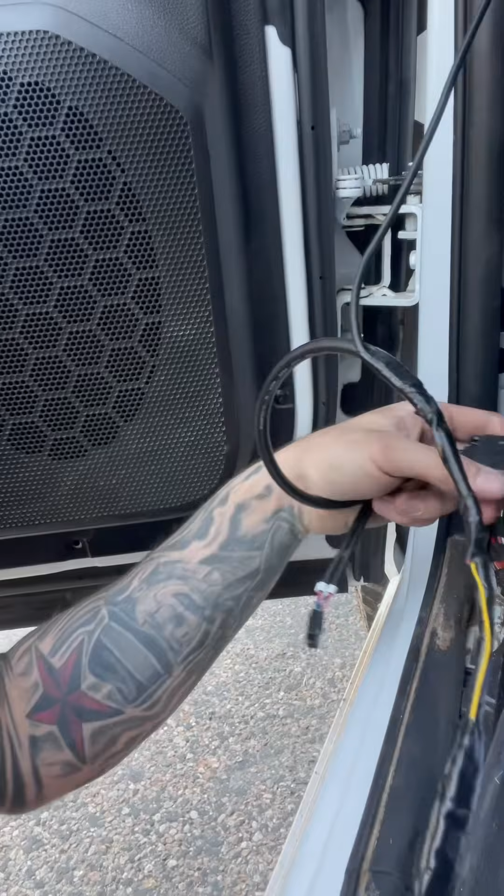This is the module here. So the module is right here. Okay, it gets connected to - sorry, I've got my phone freaking backwards - so it gets connected to the wideband.

So for those of you who can or can't see, you get in your truck and take a look up here, there is a rubber grommet by the steering wheel. I actually cut a hole in that rubber grommet and a hole in the other rubber grommet, and I ran the line through here.

The line goes down and goes over part of the transmission, under the transmission, and connects to where I have the wideband. I'll show that coming up in another part of the video, as we go step by step.

First, I'm going to get all the wiring where it needs to go, and then once the wiring is where it needs to go, I'm going to do the calibration, which I'll show in the video as well. Then once it's calibrated, I'll tighten everything down and cover everything up and basically hide it, so it has that clean factory look to it.

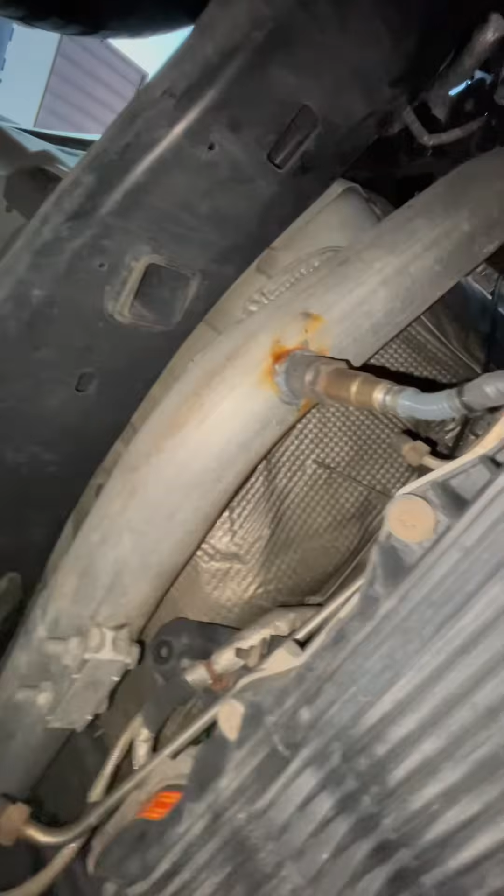So underneath the truck here, don't pay attention to the dirty ass TIG weld here. I went outside at work to weld it, and go figure, being in Texas, it got windy. So whatever, it is what it is. It's still a solid weld - there's no pinholes or nothing.

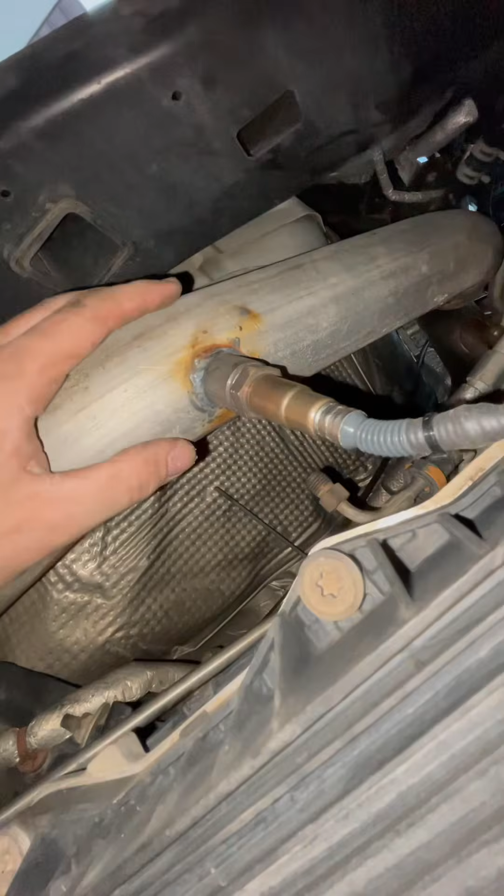So the wideband should be 24 inches from the turbo, which it is - 24 inches. And it cannot be dead set on the bottom. Now, I didn't want to take the pipe off the truck, because the proper way to do this would have been to take the pipe off the truck and put it up here somewhere.

But you can do it between, technically they say between 3 and 9, which is here and here. So this is real close to 3 and 9. It's just so when condensate runs down, it doesn't wreck the sensor. So it is recommended that you put it on the top.

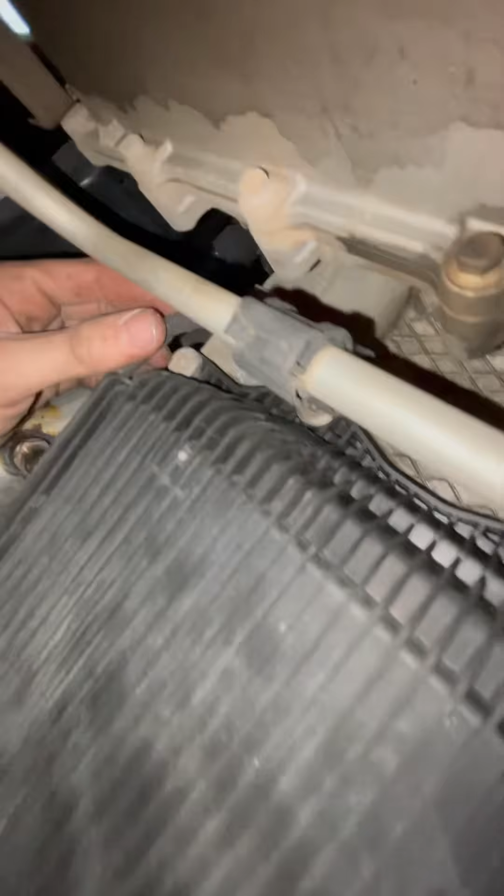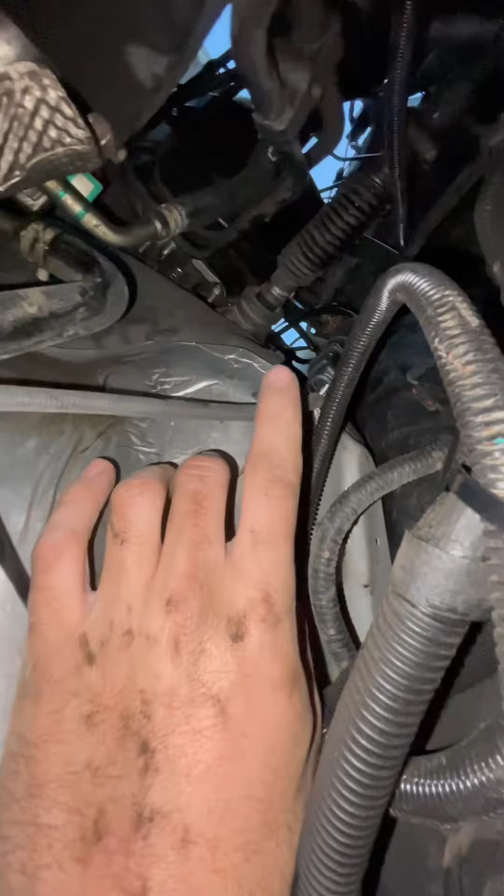So when we do the 4-inch down pipe, we'll put a bung on the top and put it up there. So it comes out, we go over this around the transmission, we go over here, we just put a zip tie up here, and then it runs up, connects, and then it goes through a connector on the firewall.

So from there, that'll be the rest of the video, showing kind of where the wiring goes and things like that. You need to leave this out to calibrate it.

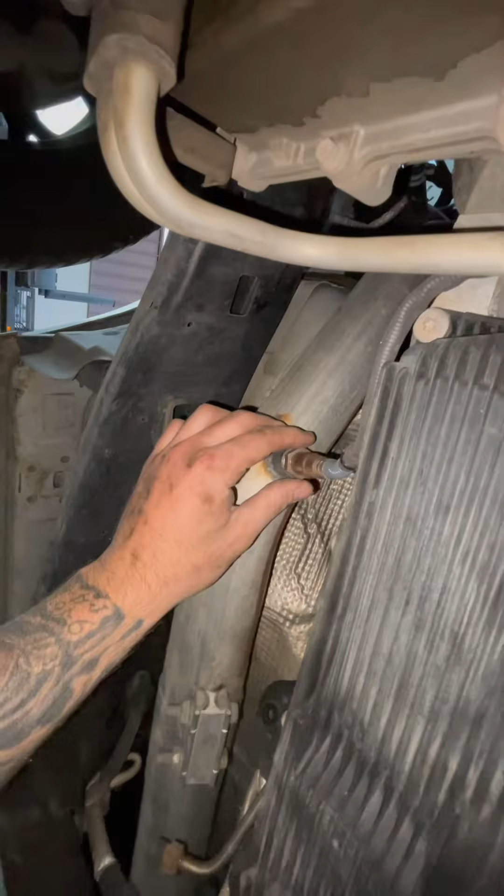So we have it - I shot the video backwards, so the sensor's already calibrated for me, but you have to leave this out in order to do the calibration. So just keep that in mind. Otherwise it's going to be a pain in the ass having to take it in and out.

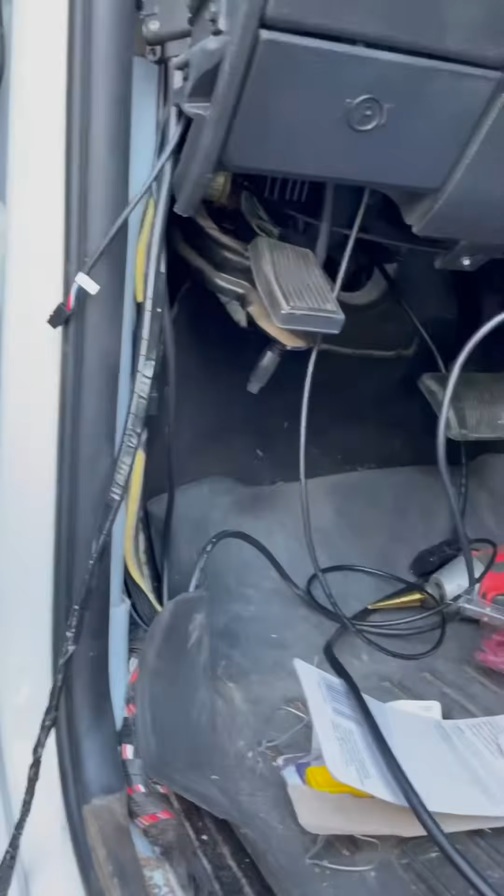All right, now that my Coke is watered down, let's take a look here.

So we have this panel off. Hold on, we have this panel off and this panel off. Now what we have here is the LC2 module, which is right here.

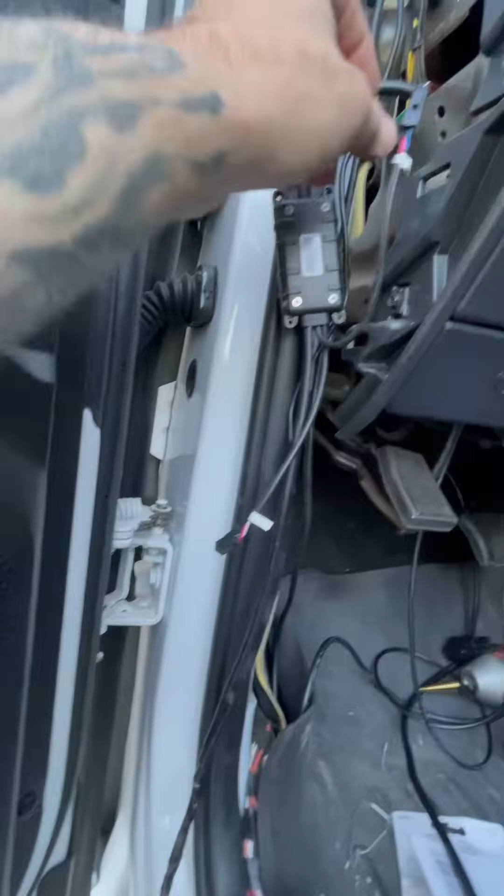We have an output. The output that comes with it is this serial, which goes to an old school computer. That's going to get hung up underneath the dash, and we'll buy the right connector for that, so we can plug in and actually log and make real histograms based on the engine, which makes editing and logging really easy for those of you who are familiar with HP Tuners and things like that. Now what we're doing is we're putting this right here, okay?

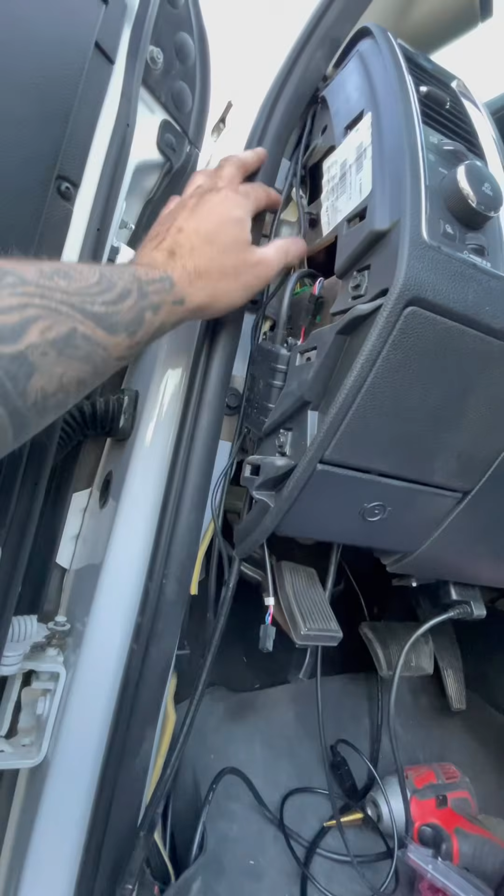Everything else is tucked up, all the wires are tucked up in here. The gauge is right there. So now we have this wire taped together. Everything's taped up. Here's the ground - we're going to choose to ground it right here to that ground.

Now the wire is super long, and it's probably honestly way too long, but the reason for that is, so I should start with this - we completely tape this because after it goes through the firewall and up the wall, we don't want to have to find the wire and protect it by any means. So we put tape on it so it'll go through.

It's made extra long. It's going to go up to the fuse box, so it's also going to go through that rubber grommet around the steering. It's going to go up over to the fuse box, and then we'll cut it to length and put the wires in their appropriate location.

For now, we're going to make changes later for a better power setup, better for the power.

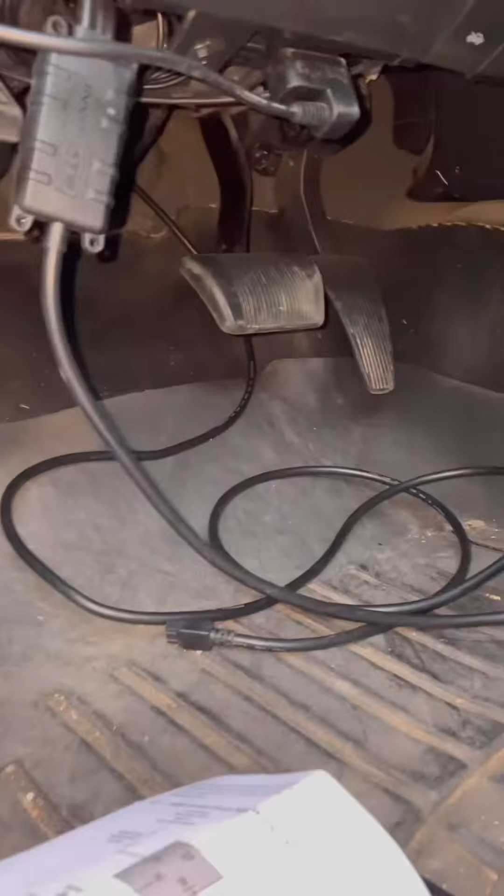Okay, so I moved stuff around a little bit. You can see there's just some wires here hanging out from underneath the dash. Ignore this, this is for my Banks, that'll have to get moved eventually.

And Banks, by the way, does make a 12-volt plug-in, so you can run it up to a fuse box instead of running an OBD2. So I'm going to have someone do that as well.

But so here's the module, whatever you want to call it. Here's the cord, it's plugged into the oxygen sensor. The oxygen sensor is not in the exhaust stream. And then this is right here. So what we're going to do is calibrate the sensor.

So this is our wiring, our thing right here. Sensor calibration, blah blah blah, have it in the right location. We went over that earlier in this.

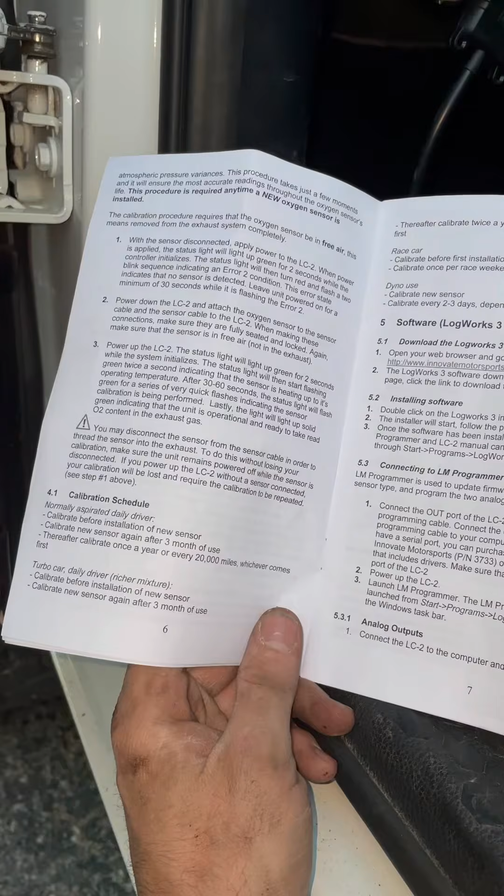With the sensor disconnected, apply power to LC2. When power is applied, the status light will light up green for 2 seconds while the controller initializes. The status light will then turn red and flash a 2-blink sequence indicating an Error 2 condition. The error state indicates that no sensor is detected - leave it powered on for a minimum of 30 seconds while it's flashing error 2.

It was an awful time to do this because I have to piss really bad. I'm not really seeing this flashing that it's talking about.

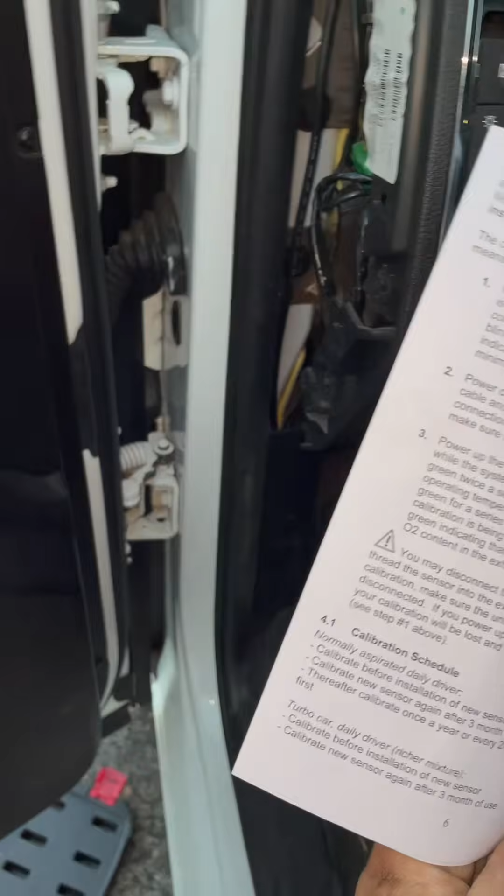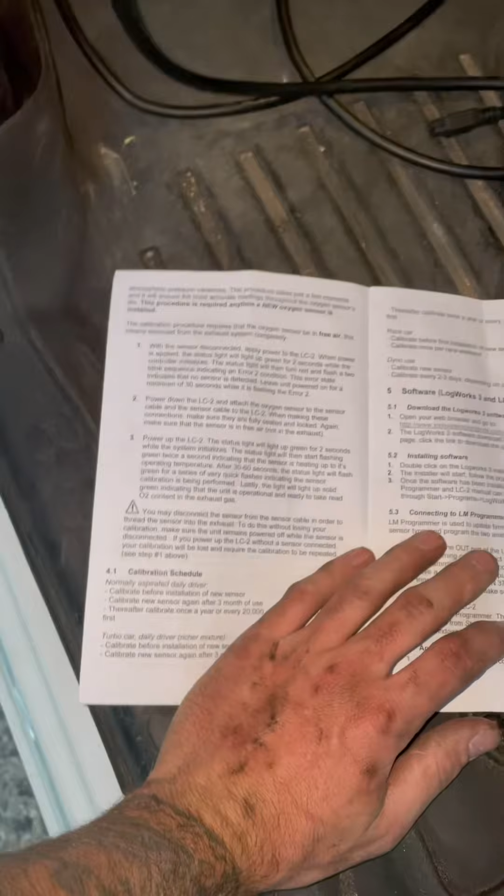Shut off, okay let's see what this is. So power down LC2, attach oxygen sensor. Attach oxygen sensor to LC2. When making these connections, make sure they're fully seated and locked.

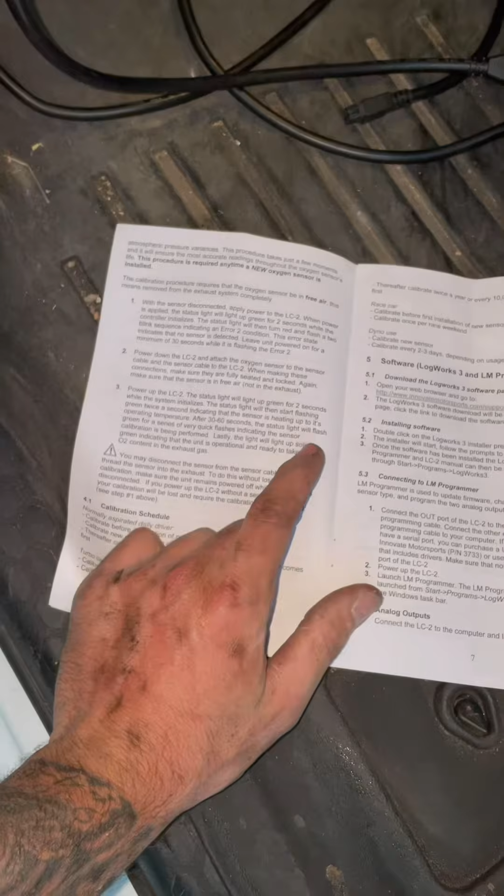Power up the LC2, so let's see what this does. There was definitely not a green status light like it said there was going to be. Doing this one-handed sucks, obviously. Unless there's a light on that box, but I don't think there's a light on that box either.

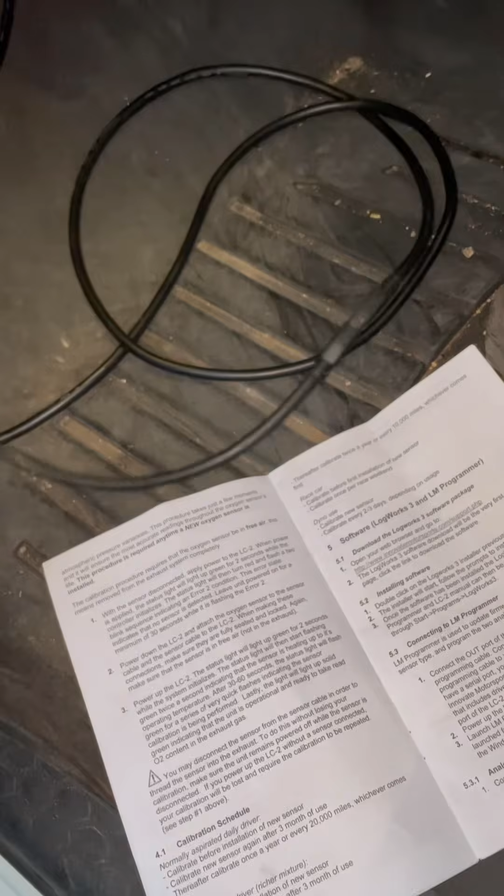Let's take a look here. Oh, all right, there's a light right there. I'm an idiot. Okay, let's go back to run. And it looks like it worked.

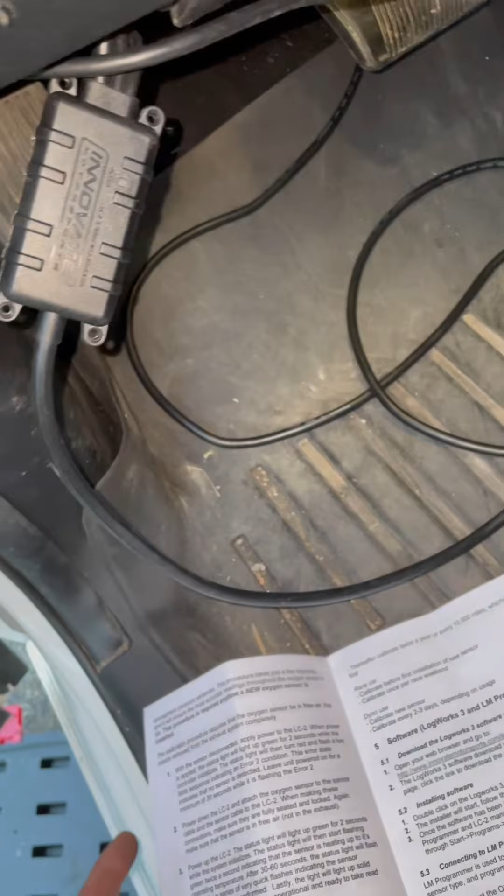So we're watching that green light. Let me turn my volume off here. We're going to watch this green light until it turns solid. Sorry it's getting blurry, that's from the flash.

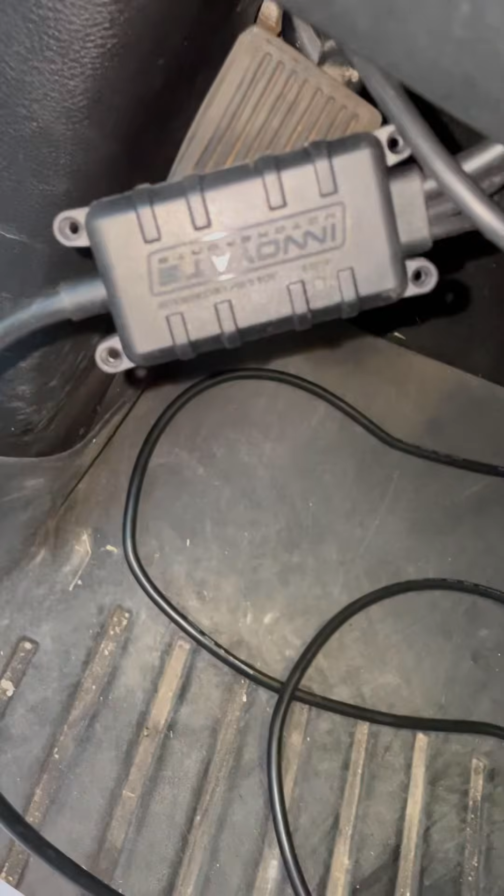Oh, I'm an idiot, so I'm using the fuel pump power. Oh, so it shows green, and now it's blinking. I don't think I'm going to get enough to do the calibration, so we'll see. Because I'm actually using the fuel pump for power, so obviously that's not going to work here if this is the case. So we'll see what this does.

Oh yeah, there it went. It's working, 22.1. It just shut off. Okay, so we'll turn it back off. Okay, we'll turn it back on. Well, it's showing 7.4, that's it warming up or whatever. Okay, so we'll just shut it back off.

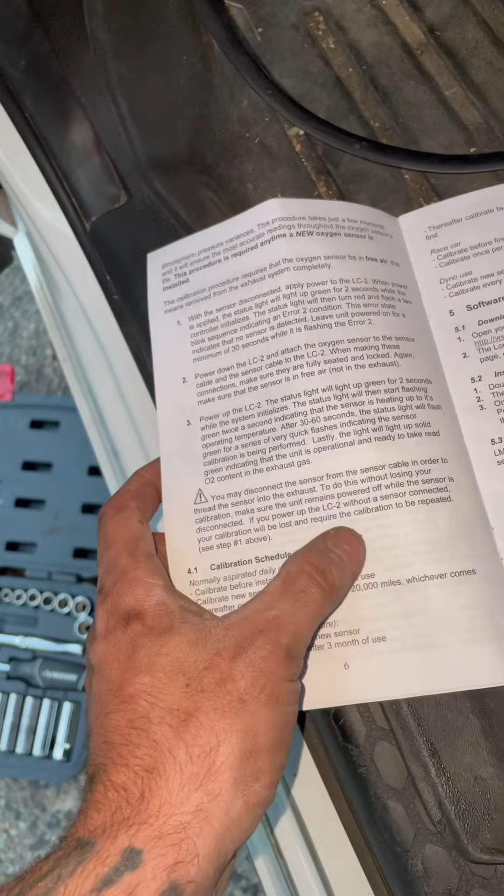Lastly, light will light up solid green, indicating unit is operational, ready to take read of oxygen sensor exhaust. You may disconnect sensor from sensor cable in order to thread the exhaust. Do this without losing calibration. Make sure the unit remains powered off while the sensor is disconnected. If you power up the LC2 without a sensor connected, the calibration will be lost.

Okay, so I'm going to get underneath the truck there and take care of putting the oxygen sensor in quick, and then we will start the truck up and see if it works.

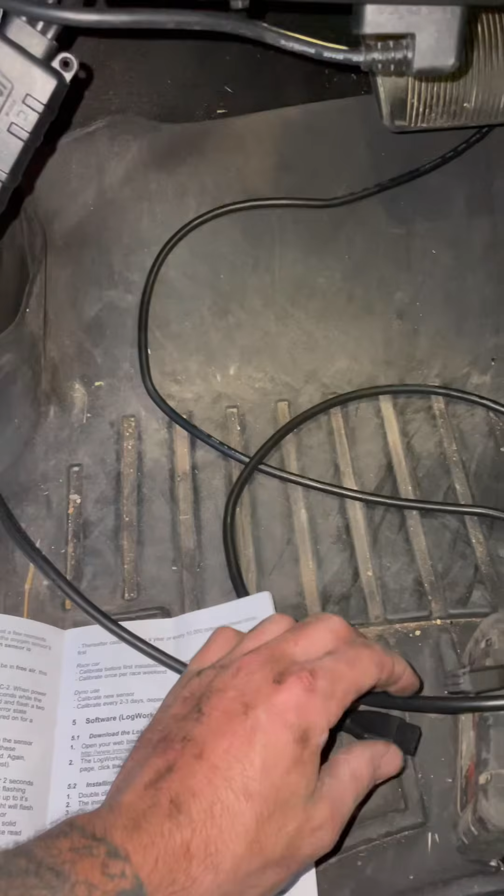All right, so sensor calibration, okay, oxygen sensor unplugged. You got to let this flash this red light for at least 30 seconds, okay? After 30 seconds, you pull power, plug this back in, and do it again. Okay, so give it a few seconds here.

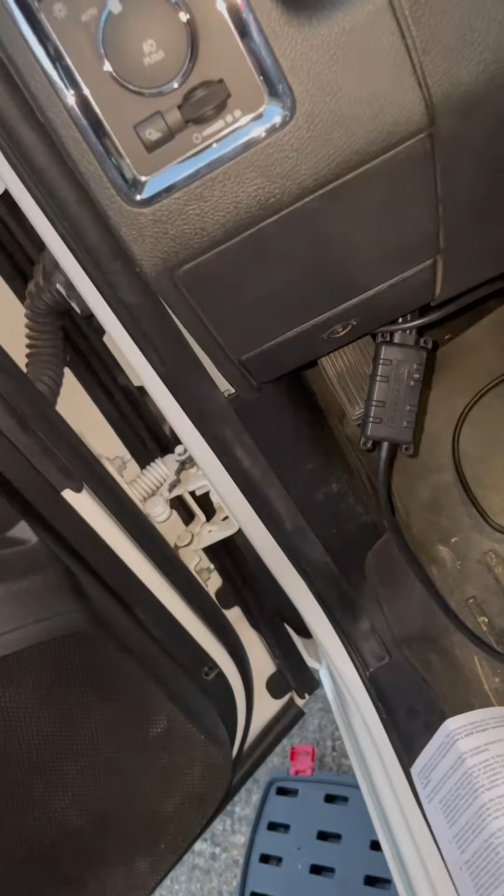We'll go 10, 9, 8, 7, 6, 5, 4, 3, 2, 1.

You know, I really hate having to calibrate this crap, but I guess it's a must. So pull power.

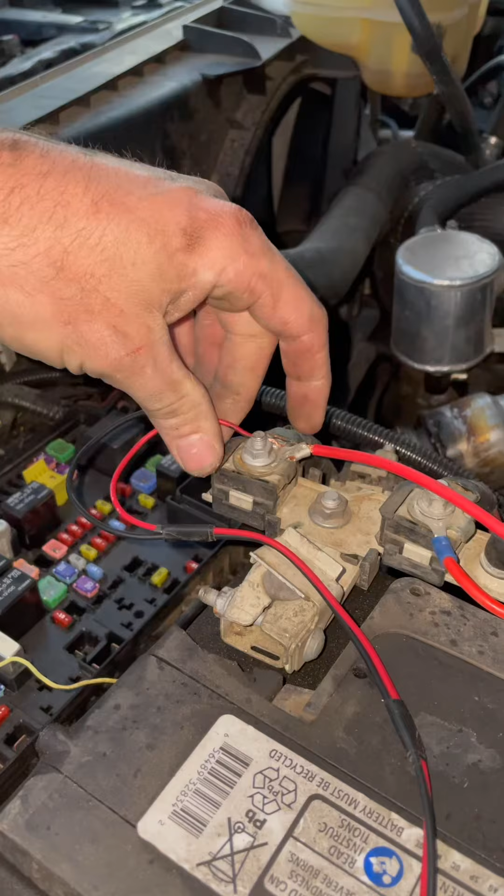Okay, come back, plug the oxygen sensor in. Now make sure the oxygen sensor is not in the exhaust stream, otherwise it's not going to calibrate very well. Okay, we'll come back and put the power on. By the way, this is hooked up like this right now because I have it hooked up to my fast fuel pump, and the fuel pump doesn't run long enough to do the calibration without running the truck.

Okay, see how it's flashing green? It's flashing green because the oxygen sensor is plugged in. The next step, when it's done, it'll go solid, and when it's solid, it means the oxygen sensor is calibrated, which means at that point you can plug in the exhaust, start the vehicle, and it'll run. Okay, so while that's flashing, we'll watch both of them at the same time and see what happens.

Okay. Okay, see it says 22.1. The green is solid. According to this...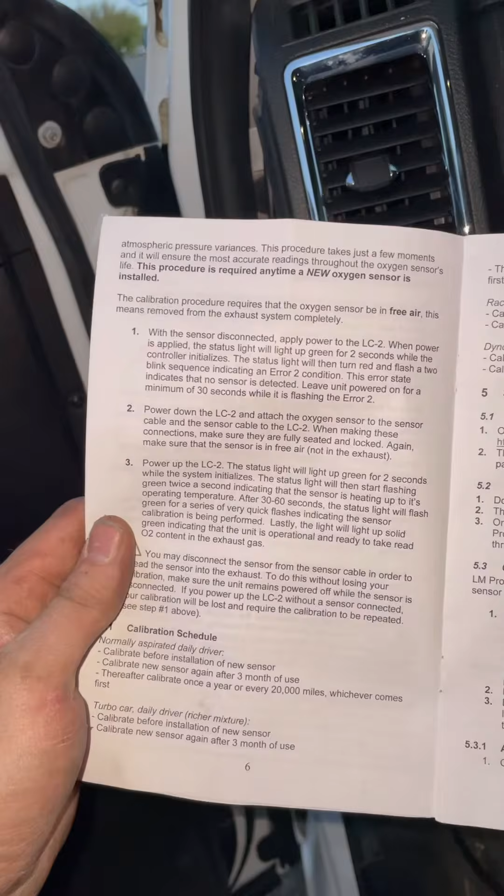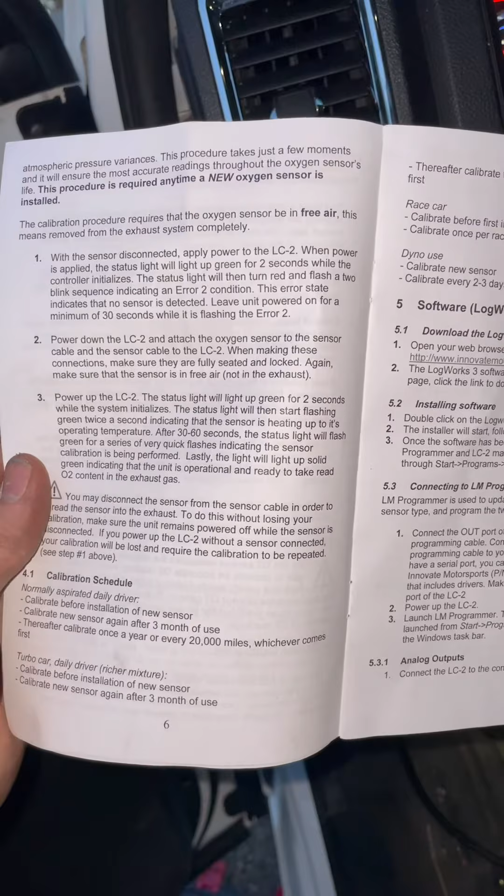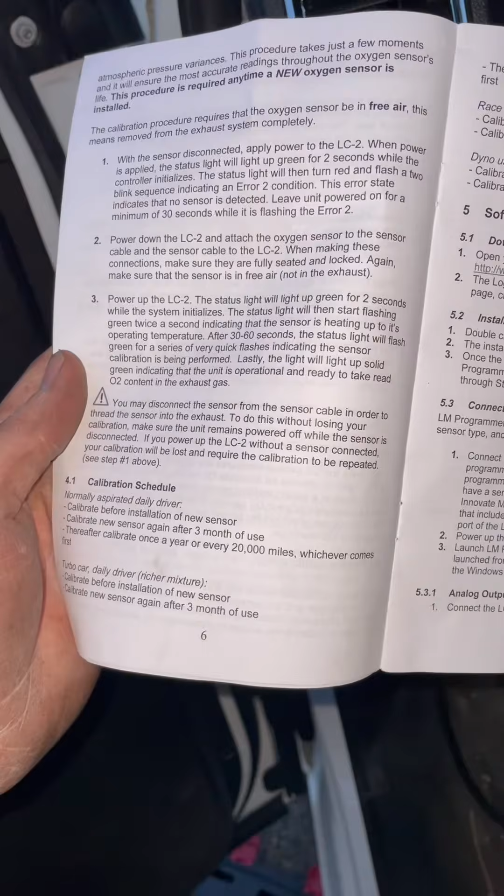After 30-60 seconds, the status light will flash green for a series of very quick flashes indicating sensor calibration is being performed. Lastly, the light will light up solid green, indicating the unit is operational and ready to take read O2 contents in the exhaust gas. You may disconnect the sensor from the sensor cable in order to thread the sensor into the exhaust. Do this without losing your calibration. Make sure the unit remains powered off while the sensor is disconnected. If you power up the LC2 without the sensor connected, your calibration will be lost and require the calibration to be repeated.

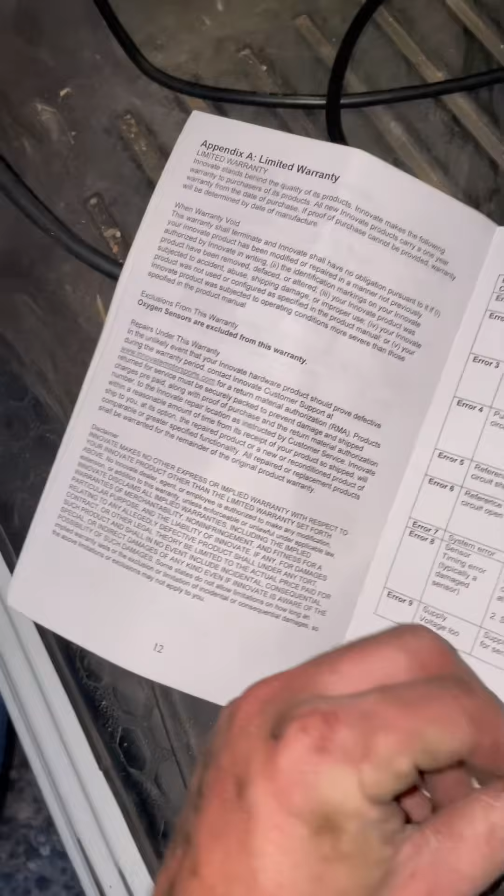Okay, now there should be a troubleshooting section in the back here, which tells you the errors, which right now we don't have any errors. So we will pull power again, okay, and once power is pulled, we're going to remove the power, and I'm going to put it back where I had it for now.

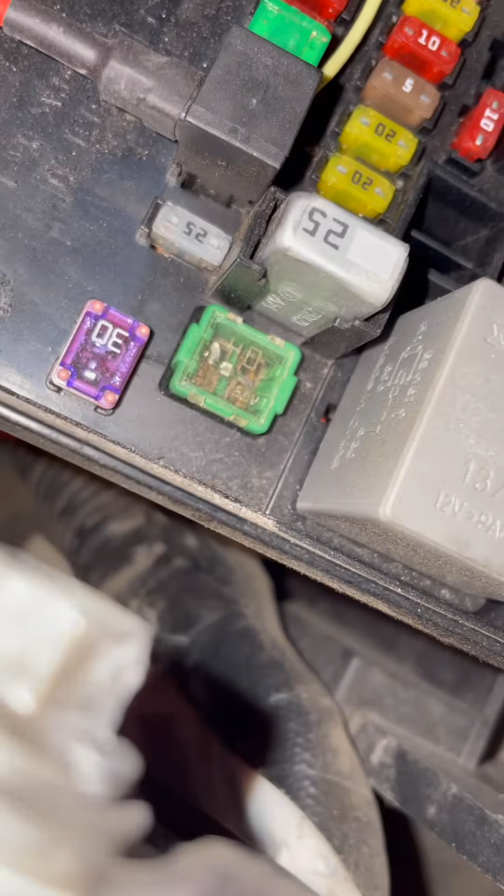Now, we're going to have somebody come and fix this power stuff here. Obviously this is a little on the ghetto side, and I don't want stuff to be ghetto, so I'm going to try and have someone come rewire some of this stuff. I want this wired into the spares and the fuse box, so we'll see.

So right, for this is a simple thing that we're just going to do for now. And I know it's ghetto, but it is what it is.

And then plug the oxygen sensor in, and we'll start the truck next and show what it does. All right, bear with me and we will see if this works. I'm going to set the phone down here because I can't push the brake and hit the...

Okay, so let's see, it's going to heat up, okay? So it does this flashing crap, and then when it goes solid, it should read. Now, if it just sits and says 22.1 or 7.5, it means something isn't wired properly, which, there's only a power and a ground. So if it's not wiring properly, I don't know what to say. It is besides that, and I'll probably have to call the company and add to this video what the fix is.

So see, right now it says 22.1. I mean, I guess there's a possibility that it's maxed it out. Let's see.

I'm gonna finish getting this stuff tied up here, which is nothing, not a big deal. You can see where it comes in up there. It's just a matter of getting these zip tied up, putting them in a nice place, and getting them out of the way. Then I'm gonna drive the truck and see how it does.

Okay, so we're driving. We're still at 22.1, which means we are absolutely maxing this gauge out on the lean side, which, like I said, is definitely good. I'm trying to get the video to be a little bit more quality here.

We're gonna get on it here and see how rich exactly it goes. Like I said, we're gonna try to pull fuel in certain areas to clean it up, or add a little bit if we need to down low.

If this is the case, if going down the highway it says that I'm running at right around here, that explains why our fuel mileage is the way that it is. And that might make me want to put other companies' tunes on it and test it and see, like, are they running that much richer than we are? Is that why their fuel economy is crap?

Sorry, this freaking stoplight, man. What the hell? Might as well just go right or something, I guess. I was trying to... whatever, there's no point in going into town.

Okay, so I'm just gonna kind of get on it a little bit here. I don't know if there's any cops nearby, so I'll just...